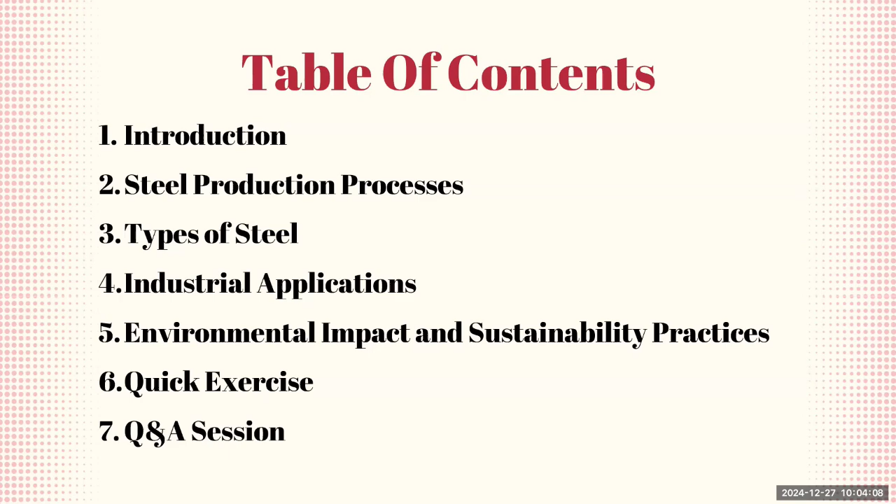So let's start with today's talk. We'll start briefly with an introduction to steel production, followed by an exploration of the various production processes, because there are many processes that differ. Then we will delve into the types of steel and see their unique properties before moving on to the actual industrial applications. We'll then discuss the environmental impact of steel production and the sustainability practices in this industry. To wrap things up, we'll have a quick exercise and finish with a Q&A session to address any questions you may have. All right, so let's start with the introduction.

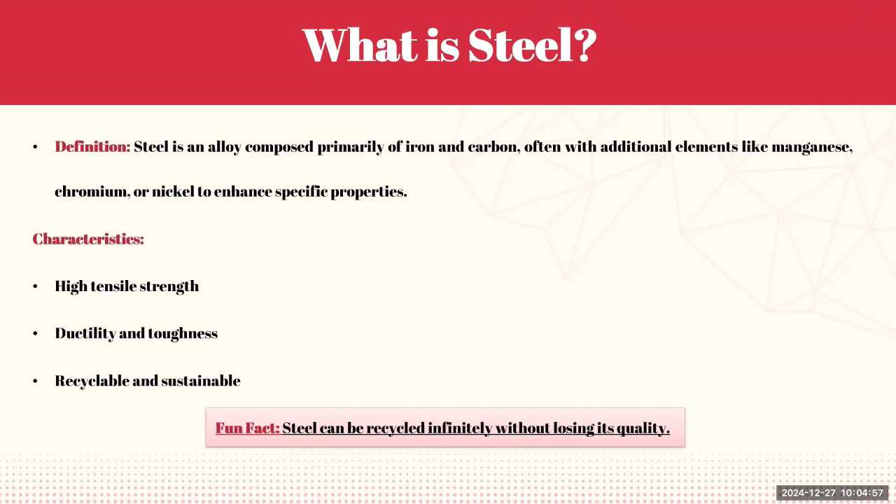So, first question, what is steel? We know that steel is one of the most essential materials in modern life. At its core, steel is an alloy primarily composed of iron and carbon, with elements like manganese, chromium, or nickel added to enhance its properties. What makes steel exceptional are its characteristics: high tensile strength, ductility, toughness, and its ability to be recycled indefinitely without losing quality. This combination of strength, versatility, and sustainability explains why steel is a cornerstone of industrial and structural applications worldwide. Fun fact: steel can be recycled infinitely without losing its quality, which is one of the most attractive features of producing steel.

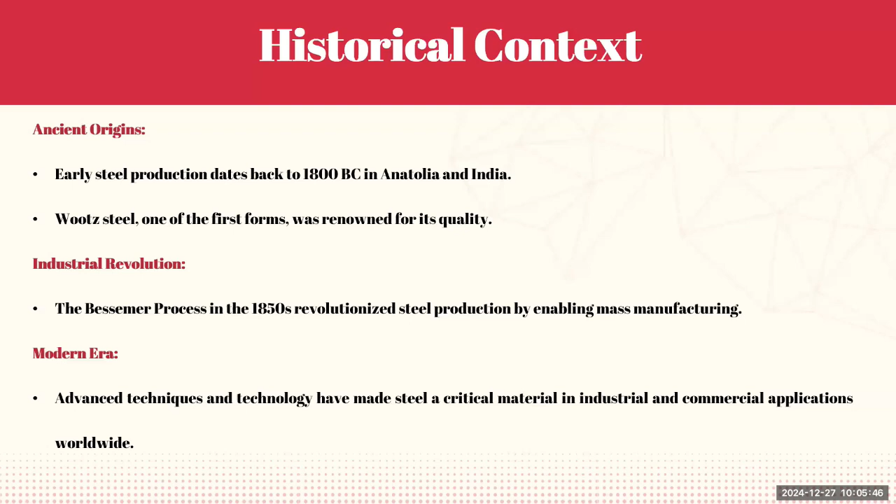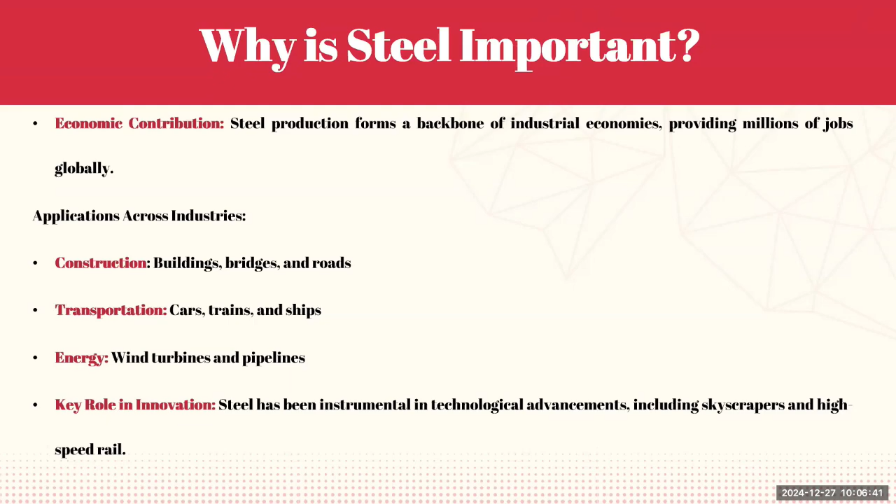Moreover, steel is a cornerstone of innovation. It has been integral to technological advancements, from constructing towering skyscrapers like the one you see in Dubai, for example, to enabling the development of high-speed rail systems. Steel truly stands as a symbol of strength and progress.

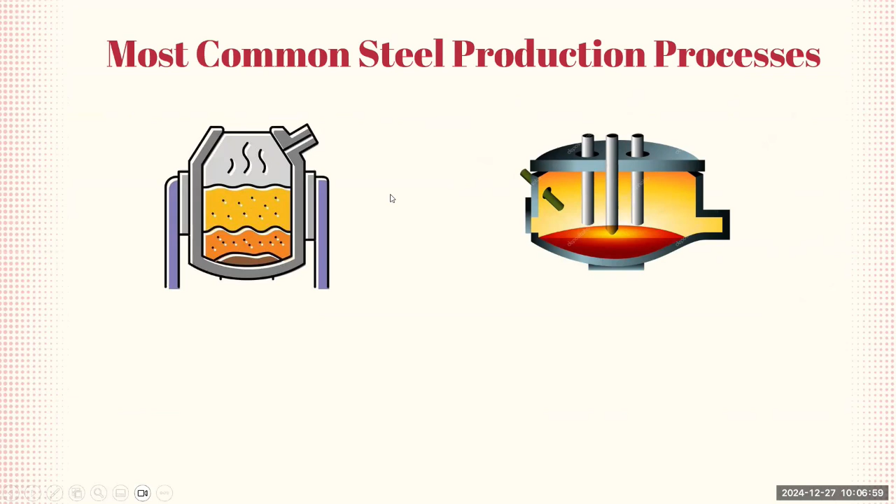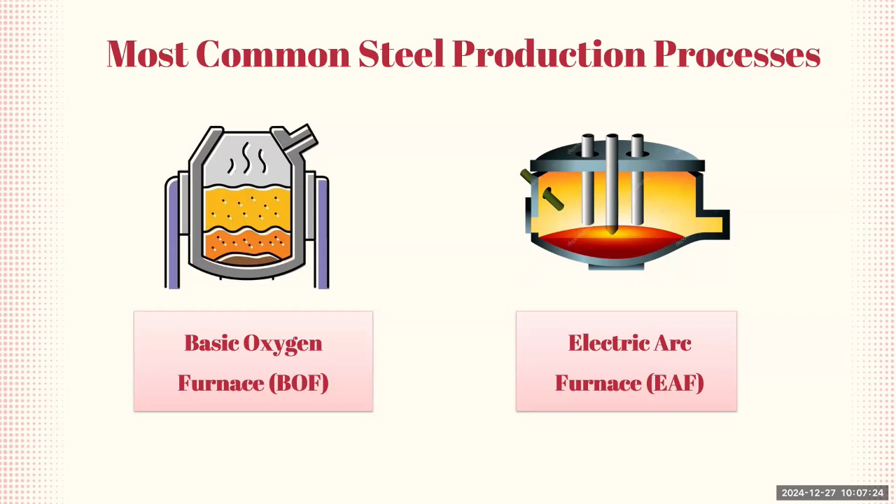All right, so now that we know a bit about steel, let's talk about the production processes and see how steel is actually made. I'll be focusing on the two most common steel production methods, which dominate the industry. The first is the basic oxygen furnace, or BOF for short, and the second is the electric arc furnace, or EAF for short. The BOF process refines molten iron from a blast furnace, combining it with scrap steel to produce high-quality steel efficiently, while the EAF method uses electricity to melt scrap steel or other iron sources, offering a more sustainable approach, especially in recycling. Let's look at each process and study more about it.

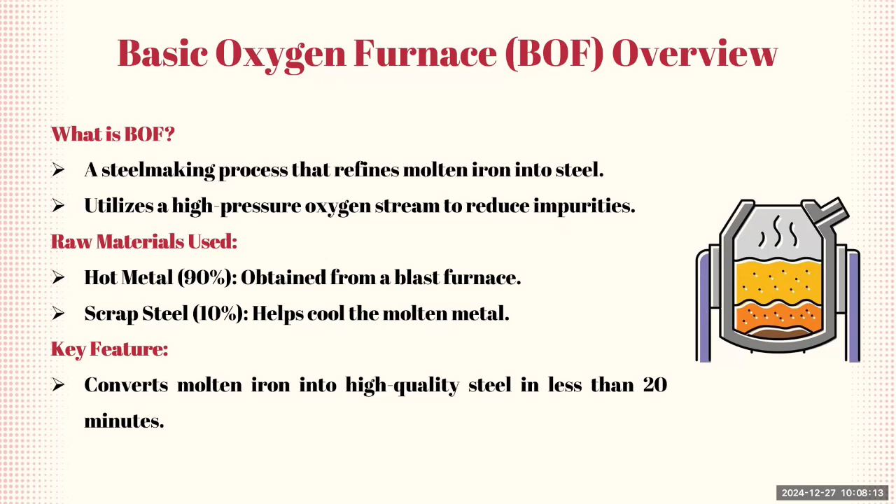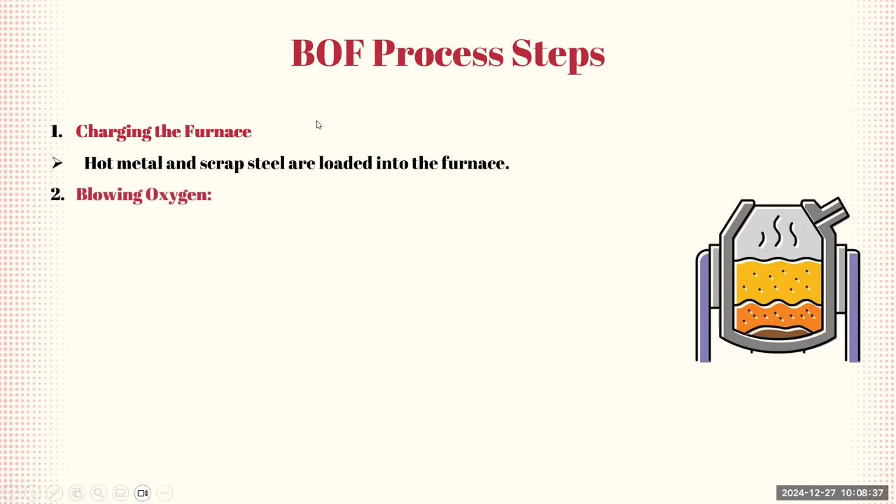Now, let's break down the key steps of the basic oxygen furnace process. The first step is charging the furnace: the process begins with loading hot metal and scrap steel into the furnace. Imagine you have this huge pot where you start loading the hot metal and the recycled steel in. The second step is blowing oxygen: high purity oxygen is then blown into the molten metal at supersonic speeds, which is very fast. This step is crucial as it oxidizes impurities like carbon, silicon, and phosphorus, forming a byproduct known as slag.

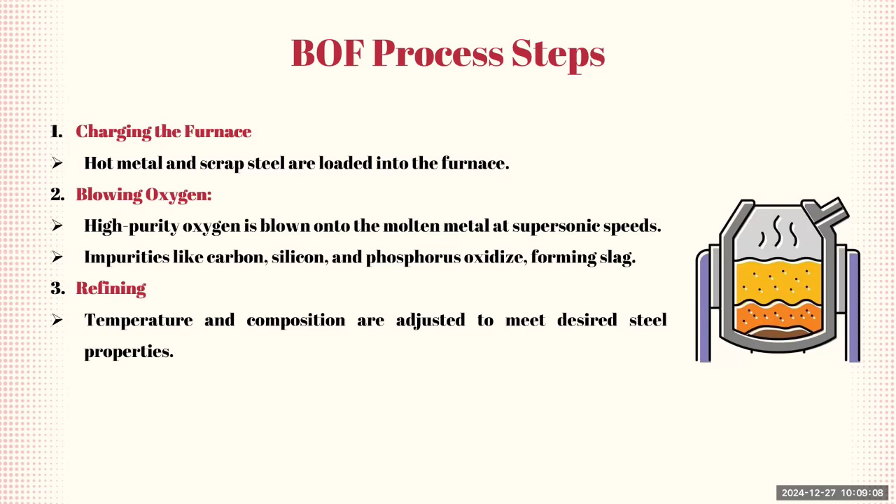Following this step, we have the refining step, which is after the oxidation, where the temperature and chemical composition of the molten steel are adjusted to achieve the desired properties for the final product. Lastly, we have the tapping, where the liquid steel is poured into a ladle for casting, while the slag, which contains the oxidized impurities, is left behind. So basically, we put the steel in the areas where we want to cast it, and this can be later processed for the desired product we want.

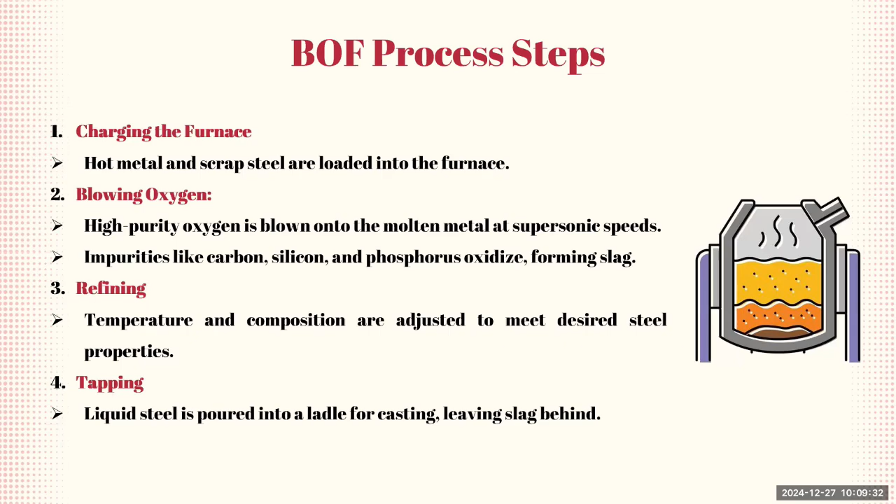All of these steps summarize the BOF process, which is a very highly efficient process for producing large volumes of high quality steel. The advantages are: first, high efficiency, so the BOF process can produce large volumes of steel in a short amount of time, making it highly efficient for industrial scale operations. Also, its quality is very high, so high-grade steel can be produced, which is important for demanding sectors like automotive, manufacturing, and construction. Lastly is flexibility, so it can incorporate around up to 30% recycled materials, which can help improve sustainability.

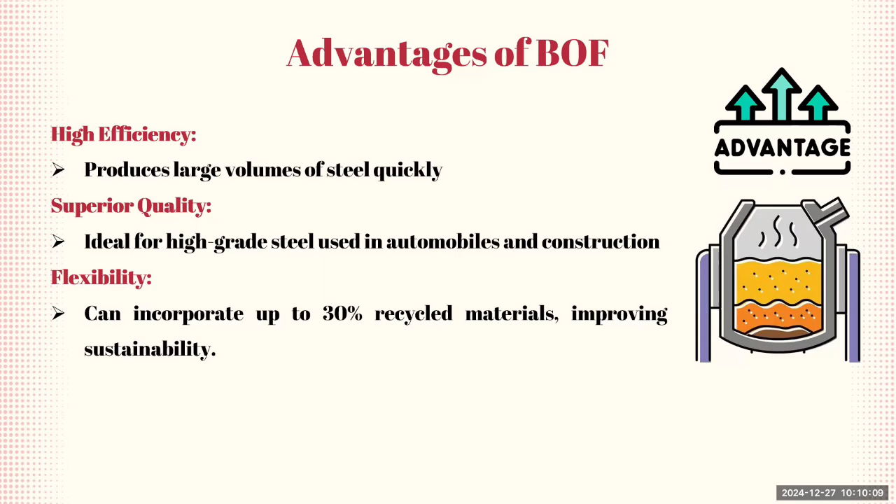But of course, the EAF can integrate more, which we'll be talking about soon.

As there are advantages, of course there are also challenges or disadvantages of this process. First, the most important disadvantage: high carbon emissions. A major drawback is its substantial CO2 output, largely due to the reliance on coal and blast furnaces, so the reliance on fossil fuels. This contributes to the steel industry's environmental footprint.

Second, it's also energy intensive. The BOF process requires a large amount of energy, especially for the iron making and oxygen production, which adds to operational costs and also releases more carbon dioxide emissions because of the need for this energy. Keep in mind, we are melting iron here, so the temperatures are very, very high.

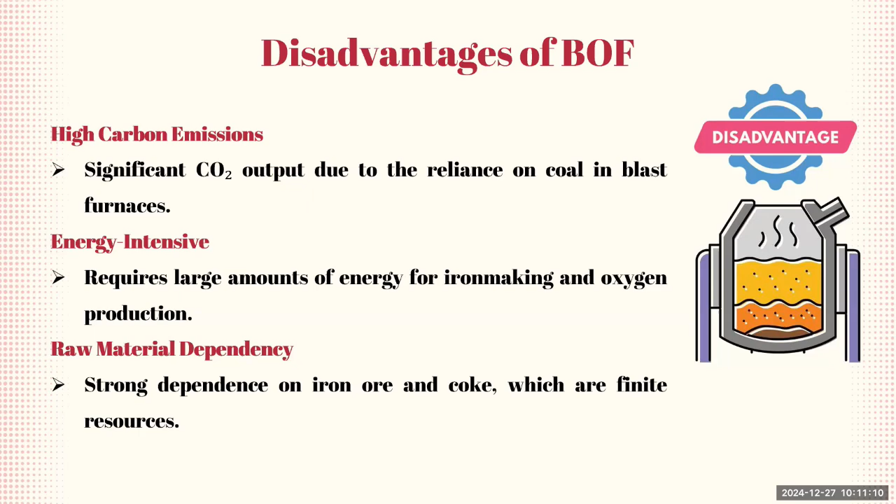Lastly is the raw material dependency. It's heavily reliant on iron ore and coke, both of which are finite resources, making it less sustainable in the long term. So these disadvantages underline the need for innovation and sustainability practices in steel production.

All right, so let's take a look at this quick one-minute video that shows or summarizes the BOF process. Dr. Lamed, could you please confirm if you can hear the video?

The basic oxygen furnace process is a method of steel making in which hot metal or pig iron is made into steel. Yes, we can hear.

Perfect. All right, let's begin again.

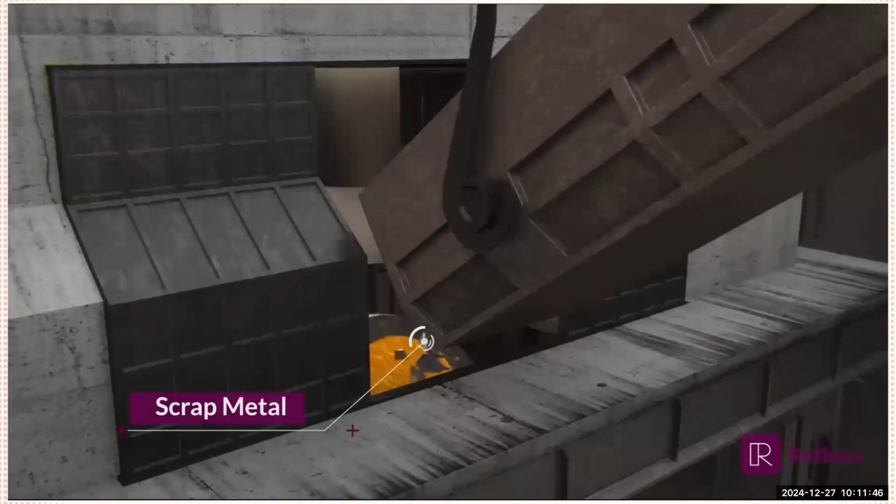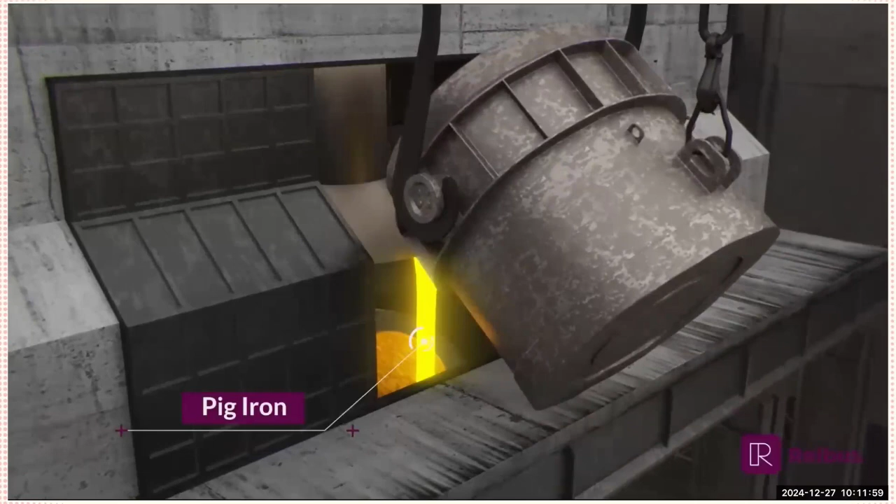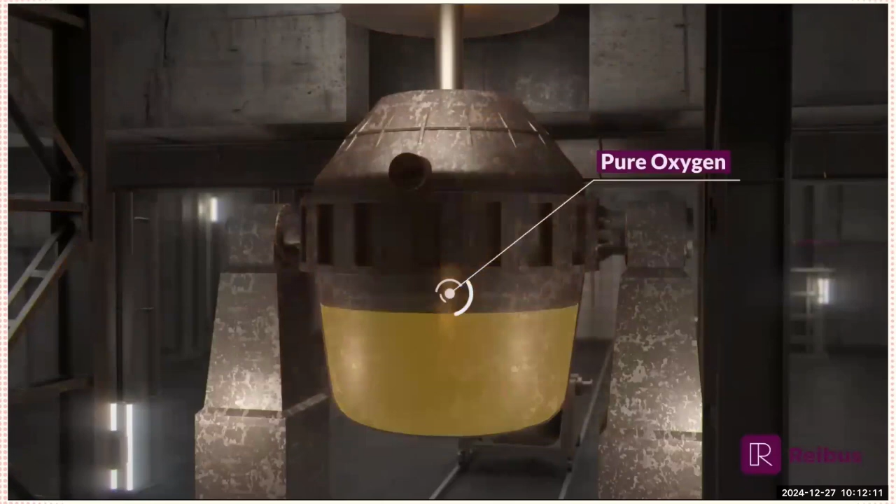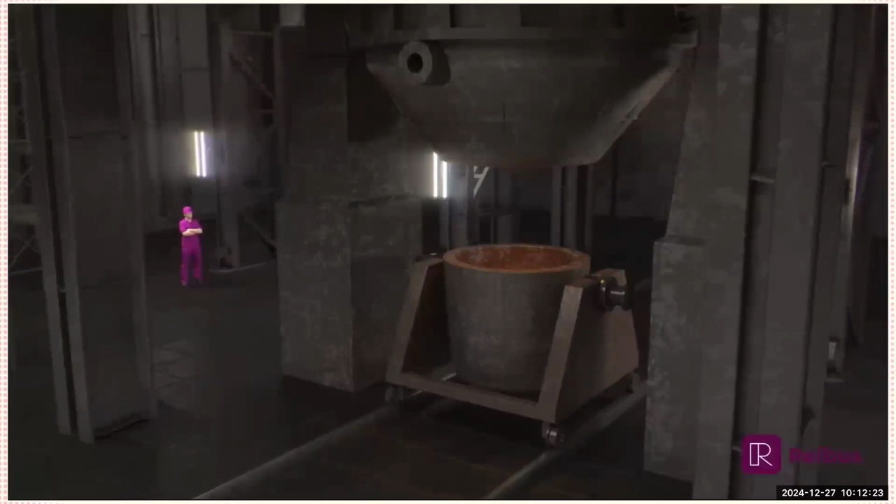The basic oxygen furnace process is a method of steel making in which hot metal or pig iron is made into steel. In this process, either hot metal or pig iron, steel scrap, and flux or burnt lime is charged into a furnace called a converter or vessel. Next, oxygen is blown into the mixture using a water-cooled metal tube called a lance. Once the carbon level has been reduced in the steel, the lance is removed, and the vessel is emptied by rotating it to pour the refined steel into a ladle. The vessel is rotated in the opposite direction to pour out and discard the slag, along with the impurities it absorbed.

All right, so this is just a quick animation to give you a better idea of how the process works. As we said, we have a huge furnace, and the raw materials are entered inside the furnace, and this is how we have this process.

All right, so now let's move on to the other process, which is the electric arc furnace. This process primarily focuses on melting scrap steel or direct reduced iron using high-powered electric arcs, making it highly reliant on electric energy compared to the BOF, which doesn't use electricity.

So the main input for the raw materials is scrap steel, which is recycled steel. Optionally, you can also add direct reduced iron, or DRI for short, which is added for quality enhancement. This is basically a type of iron that's produced from another plant, which is added to improve the quality of the steel.

The key features of this process are that it's incredibly flexible, allowing for smaller batch sizes and production of various steel grades. Importantly, it is more environmentally friendly compared to traditional methods, with higher recycling rates and lower carbon emissions. So this combination of adaptability and eco-friendliness makes the EAF a crucial player in modern steel production.

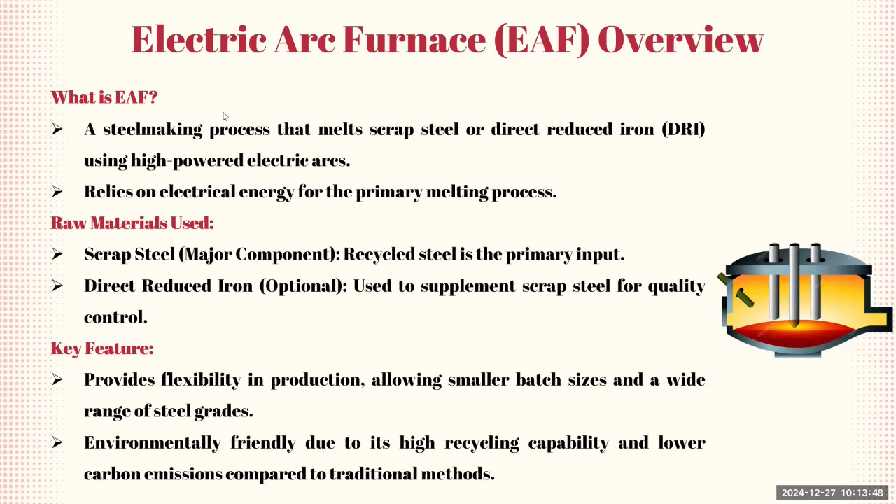So let's talk about the steps in the EAF process. The first step is similar: we have the loading step, where scrap steel or DRI, which is the direct reduced iron, is loaded into the furnace. This is the starting point, which is where the electric arc will be inserted.

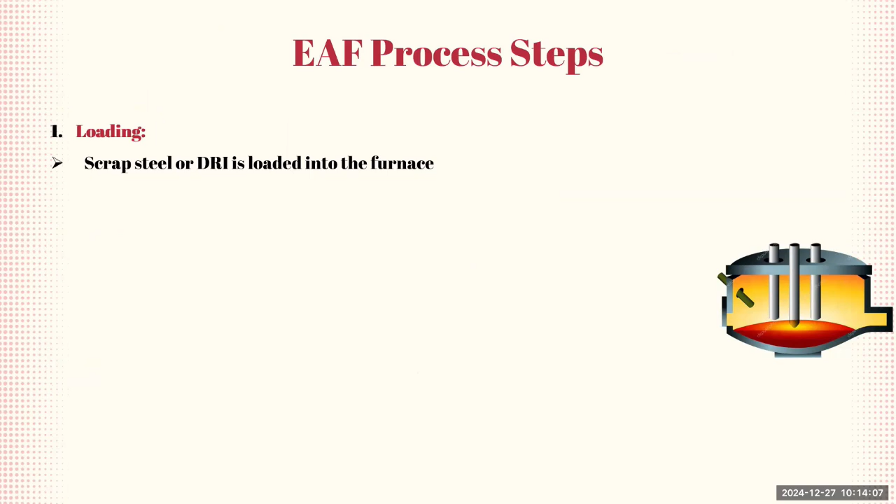Then we have the melting process.

In the melting process, high-powered electric arcs are generated between the electrodes and the scrap, melting the materials at extreme temperature. Imagine we have these electrodes inserted inside, producing electricity which heats and melts these materials at high temperatures.

Then we have the refining process, where adjustments to the molten steel composition are made by adding alloys, ensuring the steel meets specific quality and property requirements. Think of it like adding spices or components to improve the quality of the final steel.

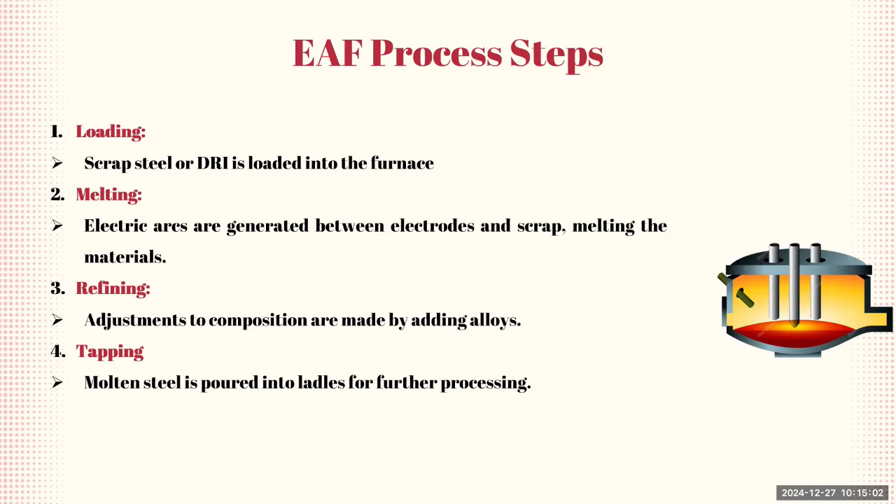Then we have the final step, which is tapping. The molten steel is poured into ladles for further processing, like shaping or casting based on our desired product. So these steps summarize the EAF process.

All right, how about the advantages? First, this process has higher recycling capability, so it can utilize up to 100% scrap steel as input, making it very strong in recycling and reducing waste. We do not need to add any virgin steel; we can just use scrap steel, which is recycled steel, to produce new products.

It also has lower emissions, because we do not use fossil fuels like coal compared to the BOF process. If the electricity is generated from renewable energy, this makes it an even cleaner or greener process. It has good energy efficiency because it uses electricity as its primary energy source, meaning EAF processes can be integrated with renewable energy, making it a future-proof choice.

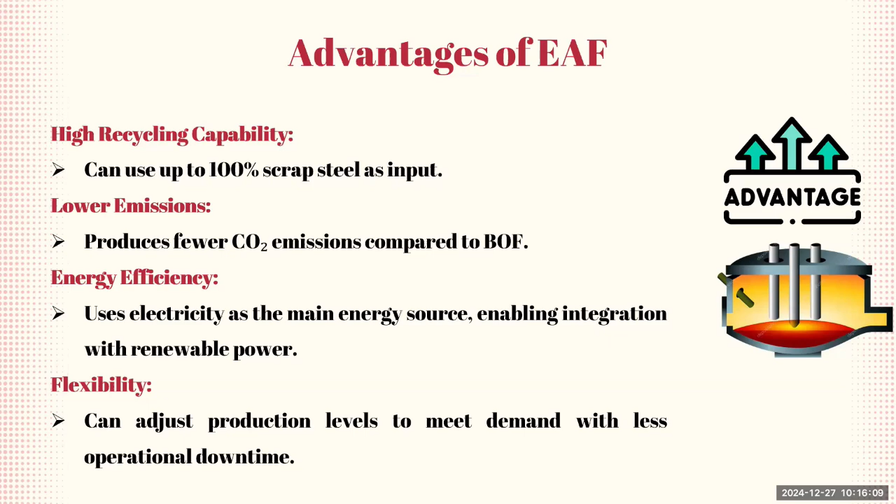Lastly, the flexibility: the EAF can adjust production levels to match demand, giving good operational flexibility and reducing downtime. So these are some of the advantages of the EAF process.

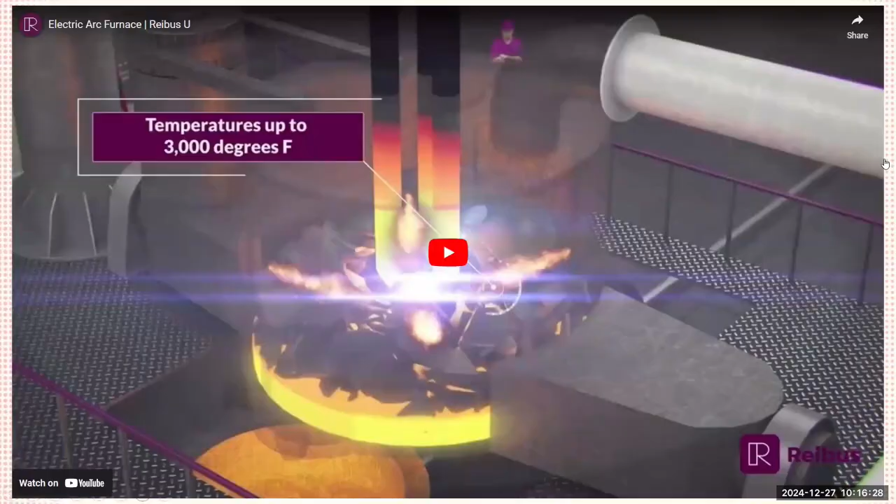As for the disadvantages, it depends on electricity. High electricity consumption means higher costs in areas with expensive or unreliable power, since every country has different electricity prices. If the electricity is expensive, this might make the process less advantageous.

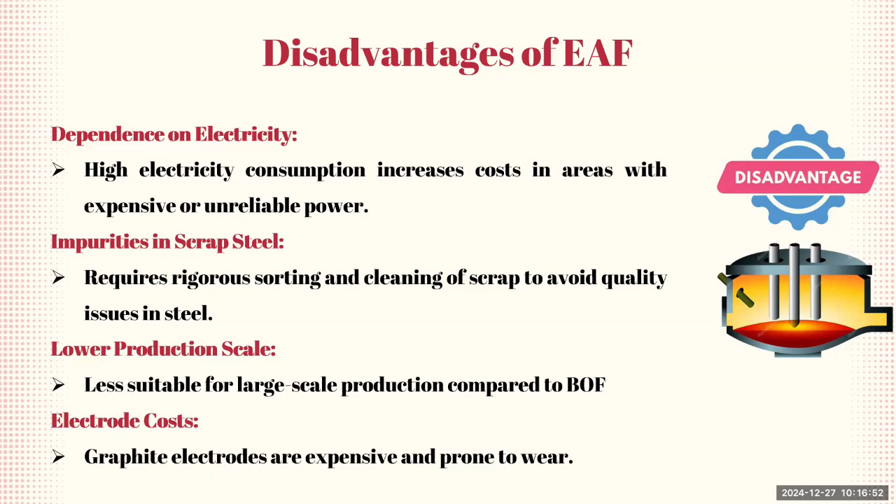There are also some impurities in scrap steel, so we need to ensure the product meets demand, perhaps by adding DRI. There's also lower production scale compared to BOF, making it less suitable for large scale production. Lastly, the electrode costs are expensive—graphite electrodes are costly and need to be maintained every once in a while.

All right, let's take a look at another quick animation to understand how the EAF process works.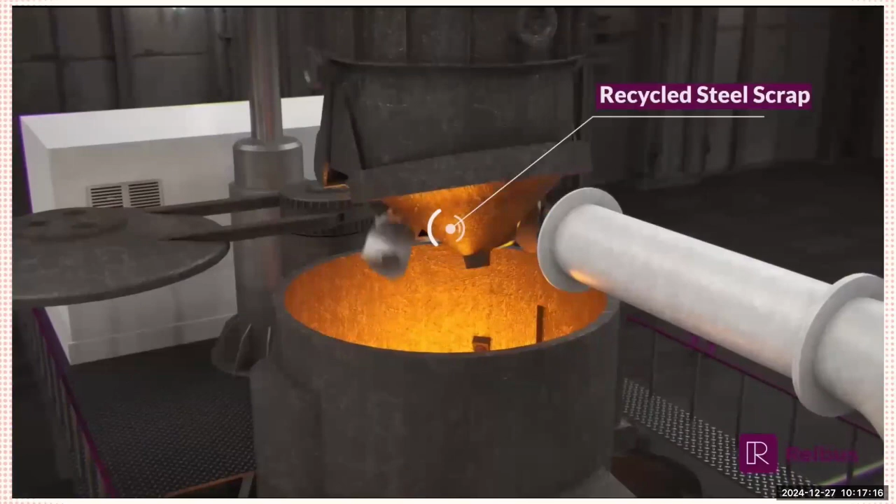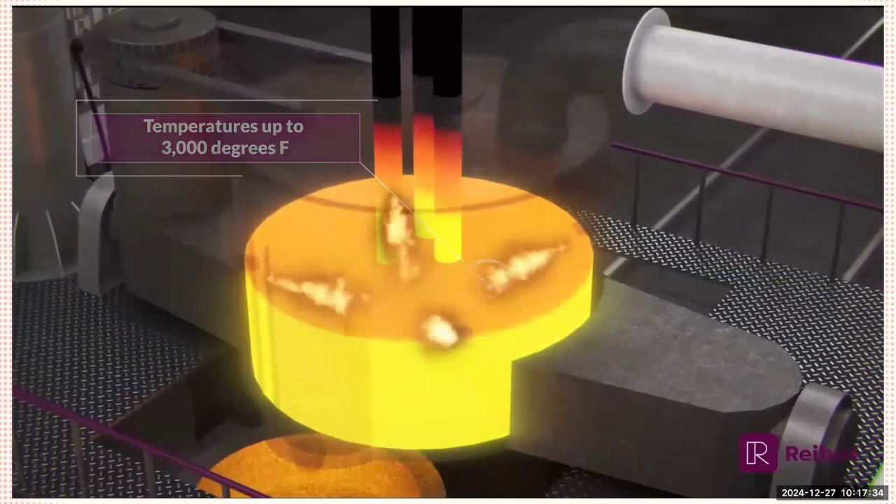Next, three large graphite electrodes send high-powered electric arcs through the scrap, generating temperatures up to 3,000 degrees Fahrenheit. At this temperature, the iron-rich raw materials melt into liquid steel, and a protective slag layer is formed.

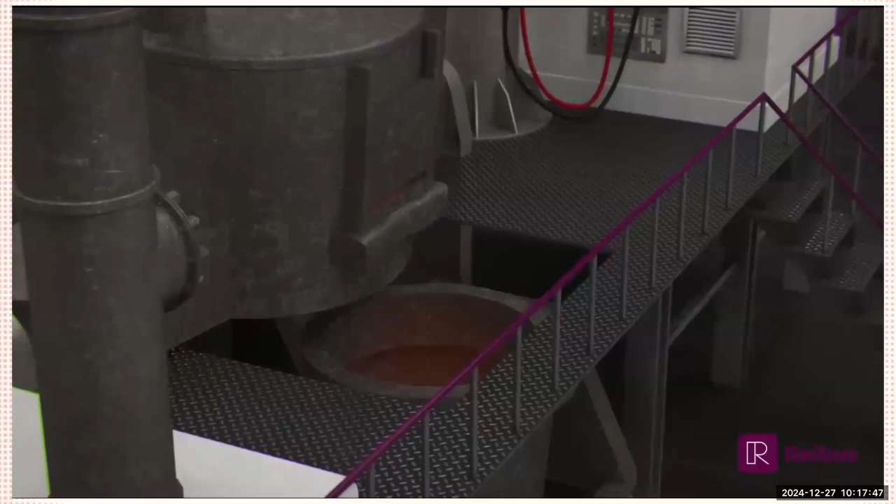Once the steel has been completely melted, it is tapped into a ladle for further processing, and the excess slag is poured off in preparation for the next heat. EAFs are very popular when building new steel facilities because of their small size, lower cost, and reduced environmental impact.

For the input material, BOF uses primarily iron ore, coke, and some scrap, while EAF relies on scrap steel or direct reduced iron.

As for the energy source, BOF depends on coal and oxygen for its operation, whereas EAF runs on electricity, making it potentially compatible with renewable energy sources.

As for CO2 emissions, BOF has high carbon emissions due to its reliance on coal, while EAF has significantly lower emissions, especially if renewable energy is used for electricity production.

For the recycling rate, BOF has a limited recycling rate, around 30% of scrap steel can be used, whereas EAF can utilize up to 100% recycled materials, making it even more eco-friendly.

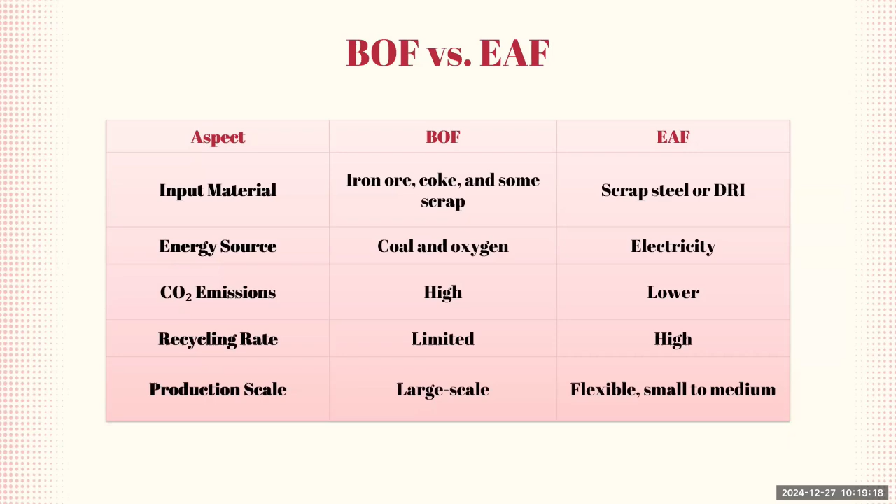Lastly, for production scale, BOF is ideal for large-scale production, while EAF offers flexibility for small to medium production scales. This is also one of its advantages, as it's quite flexible.

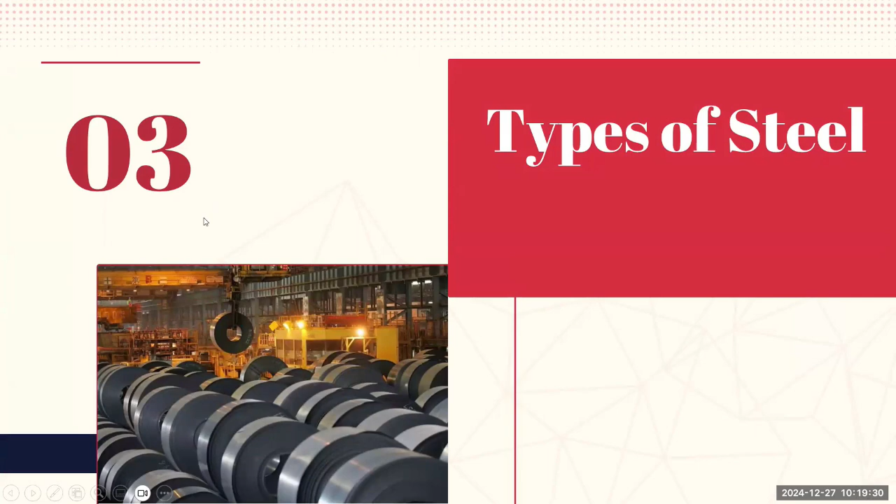All right, with that out of the way, now let's talk about the different types of steel being produced. Steel comes in various types, each tailored to specific applications and industries. The most common types include carbon steel, alloy steel, stainless steel, and tool steel. Each type has unique characteristics that make it suitable for different uses, from construction to manufacturing and other industries. In the following slides, we'll dive deeper into each type and explore their properties and uses.

So I know in this picture, they all look the same to you, but trust me, the properties differ for each type of steel. So let's talk about carbon steel first.

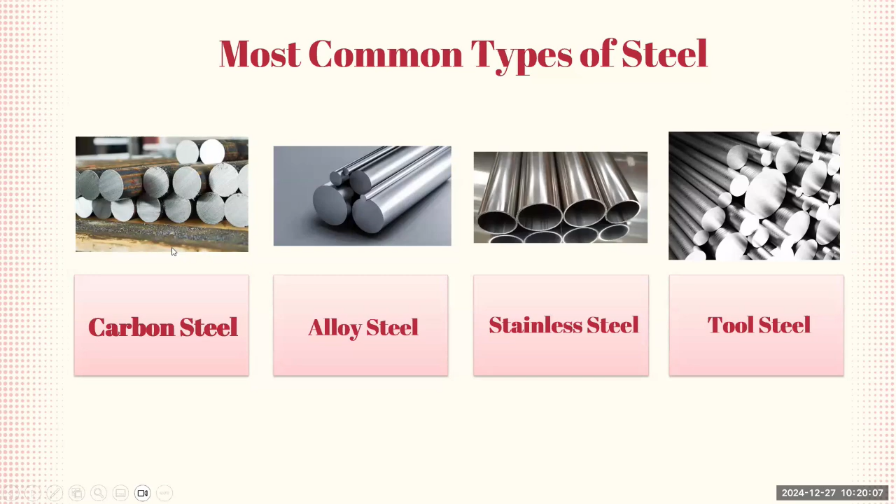Carbon steel is the backbone of steel production, accounting for nearly 90% of all steel that is being made. Its key feature lies in carbon as the primary alloying element, which directly influences its strength and flexibility.

There are three main subcategories: low carbon steel, which is highly ductile and weldable, making it ideal for construction; medium carbon steel, which is perfect for machinery components; and high carbon steel, known for its hardness, suitable for tools and springs.

The applications of carbon steel range widely depending on the type, from pipes and bridges to essential automotive parts. Its versatility makes it an essential material in numerous industries.

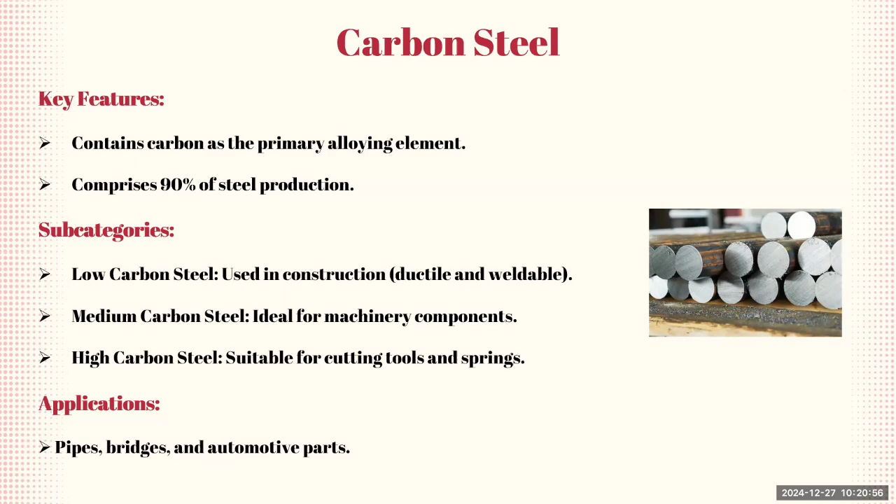Then we have alloy steel. It stands out for its unique composition, containing elements such as manganese, chromium, nickel, or molybdenum. These additional elements allow it to be tailored for specific properties like enhanced strength, toughness, and wear resistance.

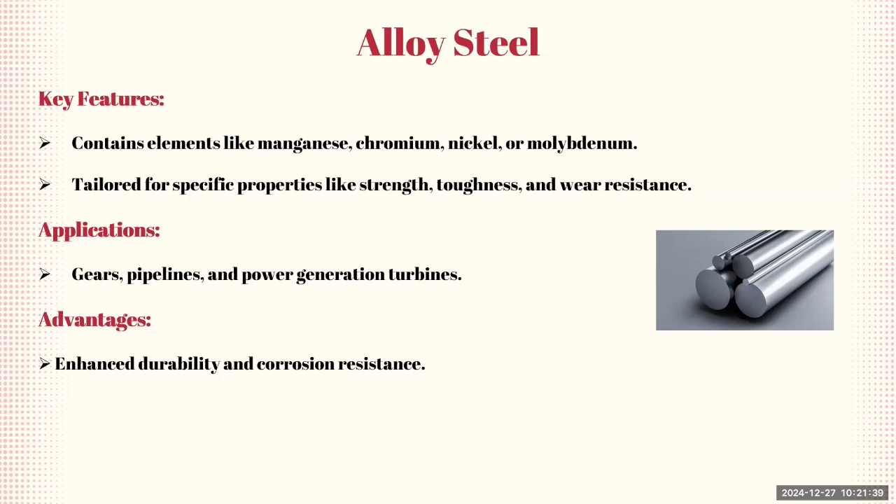Common applications of alloy steel include gears, pipelines, and power generation turbines, where durability and performance under stress are critical. Its primary advantage lies in its exceptional durability and resistance to corrosion, making it a go-to material for industries requiring reliability in demanding environments, like power plants.

Then we have stainless steel, which I'm sure everyone has heard about. Stainless steel is a versatile material known for its exceptional corrosion resistance, achieved through a minimum chromium content of 10.5%. This gives it its attractive, polished appearance, which is widely recognized.

It can be categorized into three main subtypes. Austenitic stainless steel is non-magnetic and highly corrosion resistant, ideal for demanding environments. Martensitic is hard and magnetic, commonly used in cutlery and tools like forks and knives. Ferritic offers moderate corrosion resistance and is a more economical option.

Applications range from medical instruments and kitchen appliances to architectural designs, showcasing that it's a reliable and aesthetic steel used across diverse industries.

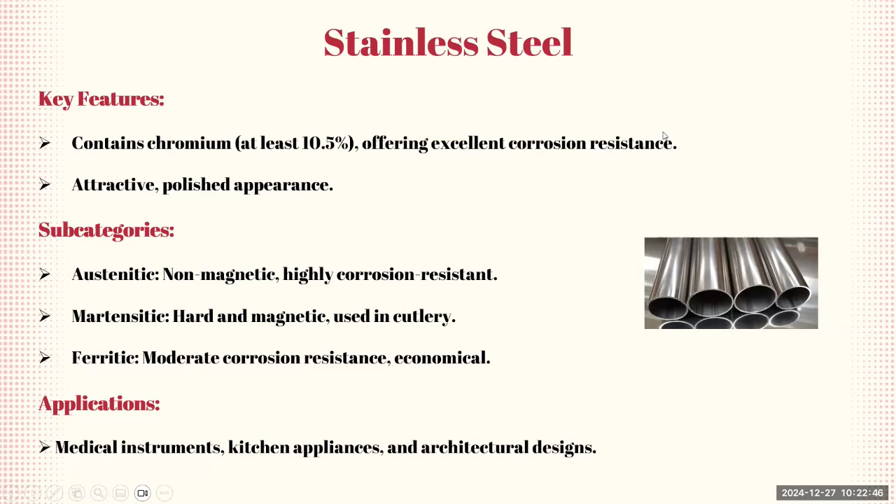Lastly, we have tool steel, specifically designed to withstand high mechanical stress and elevated temperatures, making it perfect for demanding applications. Its key features include elements like tungsten, molybdenum, cobalt, and vanadium, which provide superior hardness and resistance to deformation under intense conditions.

This steel is widely used in manufacturing cutting tools, dies, and molds due to its exceptional durability and toughness, which is why it's called tool steel. In industries where precision and strength are important, tool steel stands out as the material of choice because it's very reliable and efficient even in rigorous environments.

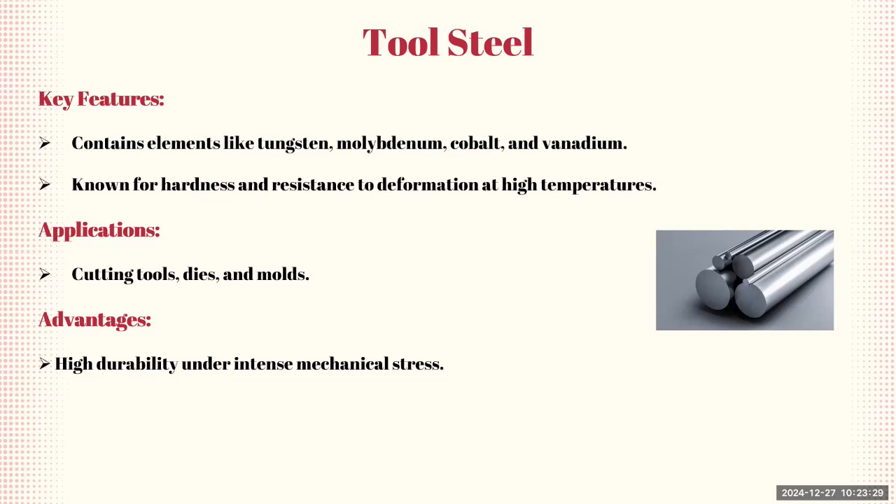So let's do a quick summary. Carbon steel is known for its high strength, making it essential for constructing bridges, buildings, and automotive parts. Alloy steel offers enhanced properties like toughness and wear resistance, useful for gears, turbines, and pipelines.

Stainless steel stands out for its corrosion resistance, which is why it's widely used in medical instruments, kitchenware, and architectural designs. Tool steel is known for its hardness and temperature resistance, useful for tools, dies, and molds.

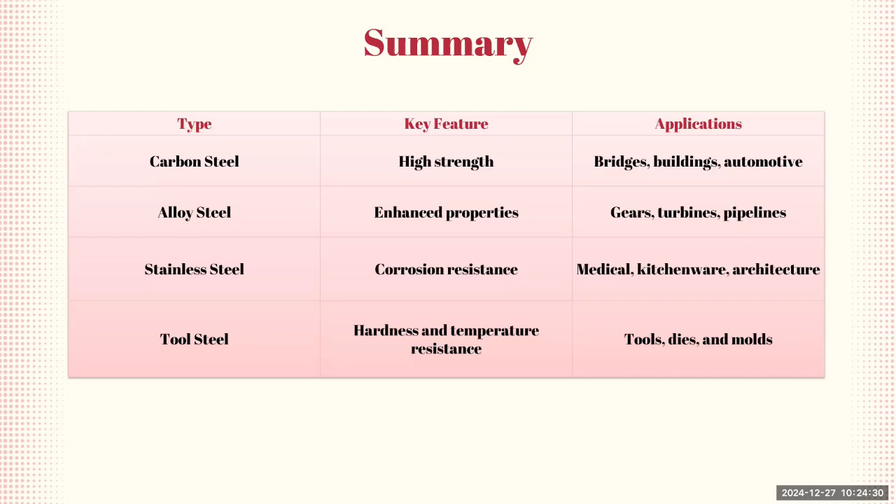So we can see that although they are somewhat similar in their properties, each steel has its own key feature and its own industry where it will be very useful. This is why it's important to know there are different types of steel, other than the normal stainless steel that we keep using in our daily lives.

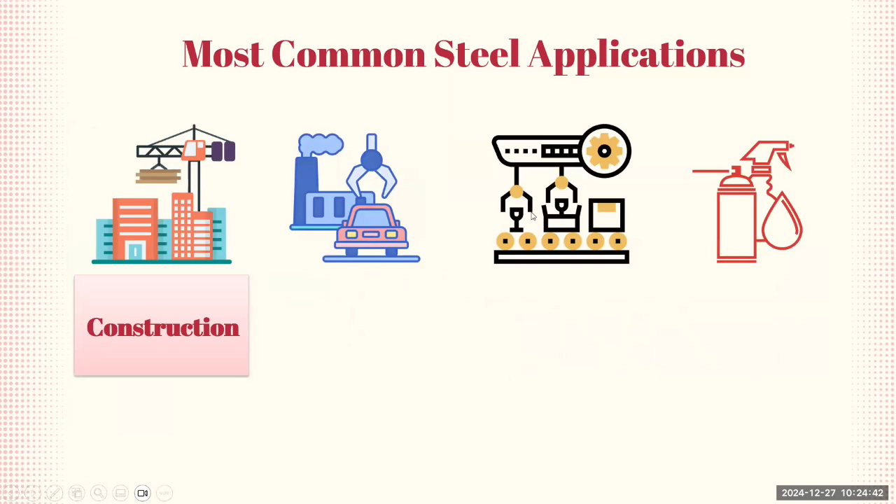Now let's talk quickly about industrial applications. We have four most common steel applications: first is construction, then the automotive sector, then the manufacturing sector, and lastly specialty products. Let's quickly go over each industry.

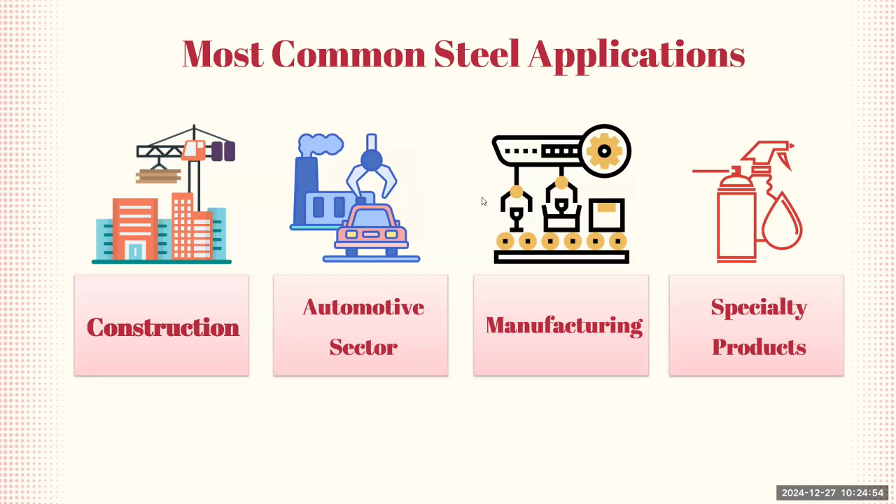Steel and construction: steel is an incredibly versatile material with many applications. In this slide, we highlight construction. Everywhere you see any construction, bear in mind that steel is 100% used somewhere.

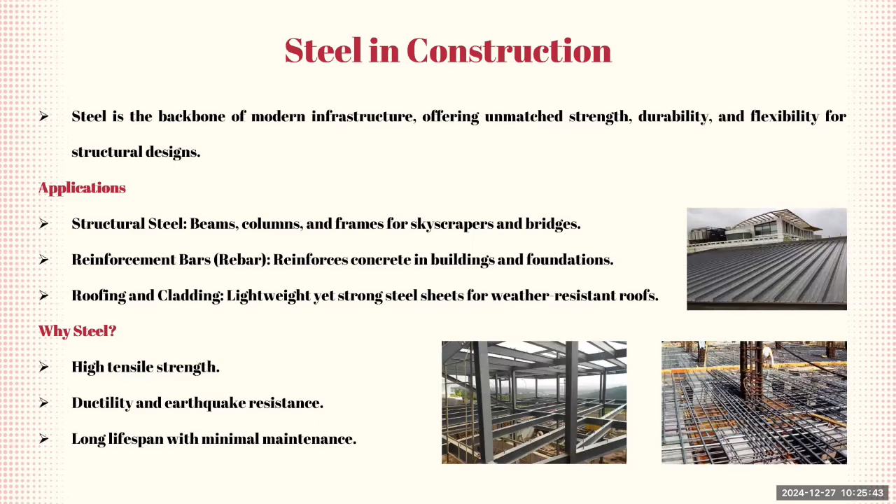So why would we use steel other than other materials? It's because it has a high tensile strength. It's ductile and it also resists earthquakes. And it also has a long lifespan with minimal maintenance required.

As for the automotive industry, it strikes the perfect balance between safety, performance, and cost. So it can be used for body panels. Low carbon steel is favored for its formability and durability, making it ideal for crafting vehicle exteriors. It can also be used for the chassis and frames, where advanced high-strength steel is used to create lightweight yet robust structures, contributing to vehicle stability and performance.

Can also be used for engine components. Alloy steel offers exceptional wear resistance and thermal stability, so this can be used in the engine. And lastly, it can also be used for exhaust systems. Stainless steel is a material of choice in exhaust systems due to its superior corrosion resistance, especially against heat and moisture.

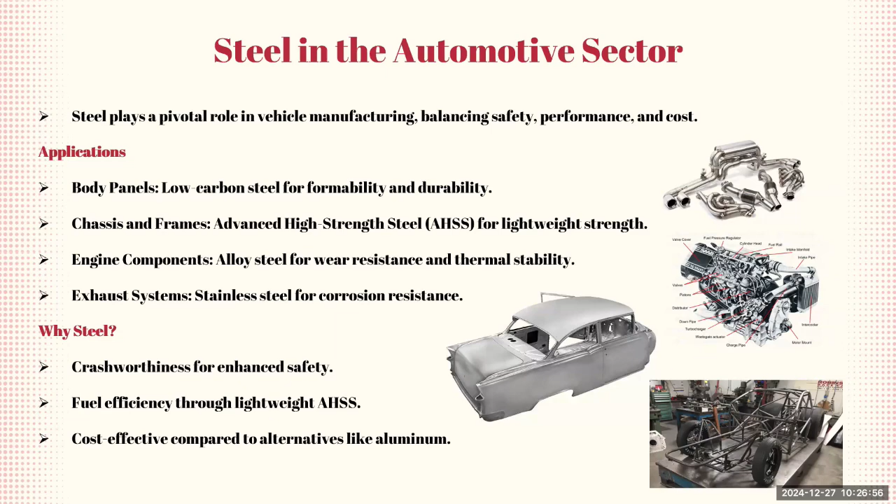So why steel in this industry and not other material? Well, first, it enhances the crashworthiness, so this ensures passenger safety. It also provides fuel efficiency because it's very lightweight. And lastly, it's cost effective compared to other alternatives like aluminium, for example, which could be more expensive.

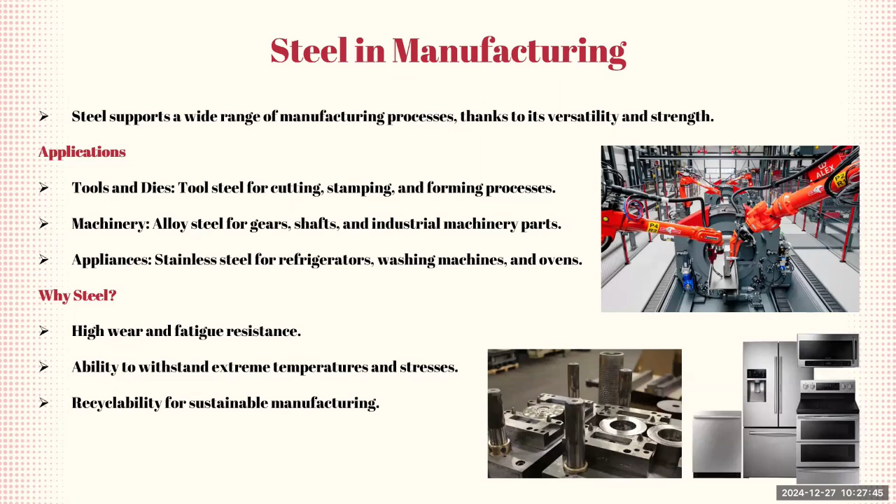And of course, the most important application is in our fridges, washing machines, and stoves, so in appliances. Stainless steel is commonly used in a lot of these machines that we use on a day-to-day basis. So why steel? It has high wear and fatigue resistance, can handle high temperature and stresses, and it's also recyclable, which is very important to promote sustainable manufacturing.

And lastly, we have steel and specialty products. It can be used in medical devices - if you've been to the dentist, you can see that a lot of this equipment, or in surgery, uses stainless steel. It can also be used for aerospace components, because airplanes need a lightweight alloy steel which can be strong yet light to ensure the aerodynamics.

And then in the energy sector, it can be used for turbine blades - wind turbines, for example, use a lot of steel. And lastly, it can also be used in consumer goods - some of your jewelry or watches are also made from stainless steel.

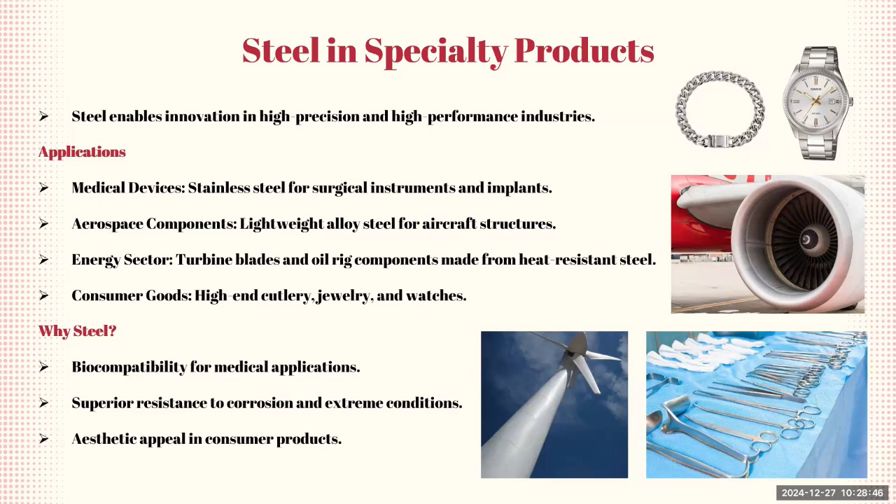So why steel? Because it's biocompatible, so for medical applications we can use it to operate on humans with no issues. There's also superior resistance to corrosion and extreme conditions. And lastly, it also has an aesthetic appeal in consumer products like watches and so on.

Now let's talk about an important issue that surrounds steel production, which is the environmental impact and also some of the sustainability practices. Steel production is very important, but it is also a very carbon emitting sector. While it's critical for modern infrastructure, it accounts for around 7 to 9% of global CO2 emissions, making it one of the largest industrial contributors to climate change.

So why is that? It's because emissions mainly stem from the combustion of fossil fuels, like coal in the blast furnaces, and from process emissions during the reduction of iron ore to iron. Did you know that producing just 1 ton of steel emits approximately 1.85 tons of CO2? That's a very huge figure. The basic oxygen furnace also contributes to a majority of these emissions.

This is why it's important to decarbonize steel. First, it's to meet global climate targets, like achieving net zero carbon emissions by 2050, and also to reduce the environmental footprint of industries that rely on steel. This paves the way for a more sustainable future. So this is not just an industry challenge, but rather a global priority.

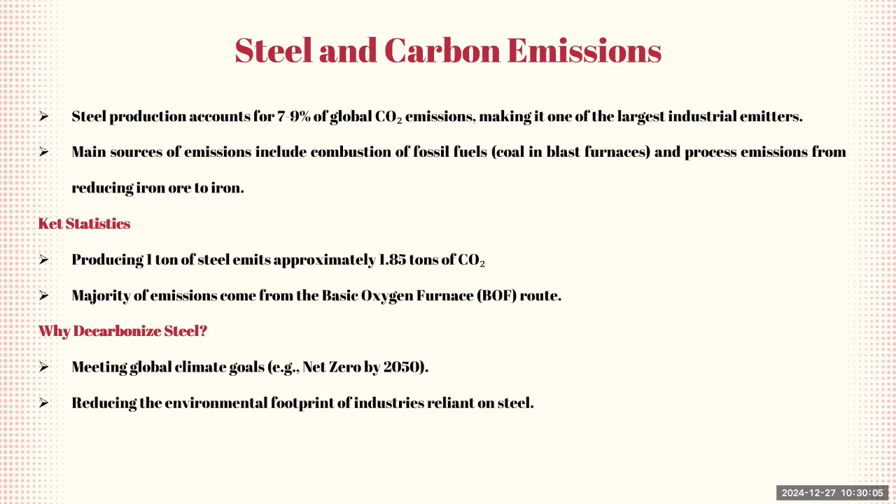So let's explore how steel can be decarbonized. We have three green steel production pathways. The first one is hydrogen direct reduction, which replaces the natural gas or coal used with green hydrogen during the reduction process. This results in zero carbon emissions from the reduction stage, positioning it as a game changer for sustainability.

Then we have the electric arc furnace. By utilizing renewable electricity to melt scrap steel, the EAF significantly cuts down on CO2 emissions compared to the traditional BOF method. This process also supports higher recycling rates, almost 100%, making it both eco-friendly and resource efficient.

And lastly is carbon capture and storage, which I'm sure you have heard about, which is to capture CO2 emissions directly from steel plants and then store them underground or utilize them later in another process. It's particularly effective for retrofitting existing infrastructure. Imagine we already have a plant and we cannot afford to completely change the whole plant to a different process - what we can do is add carbon capture storage to capture the CO2 being emitted from that plant.

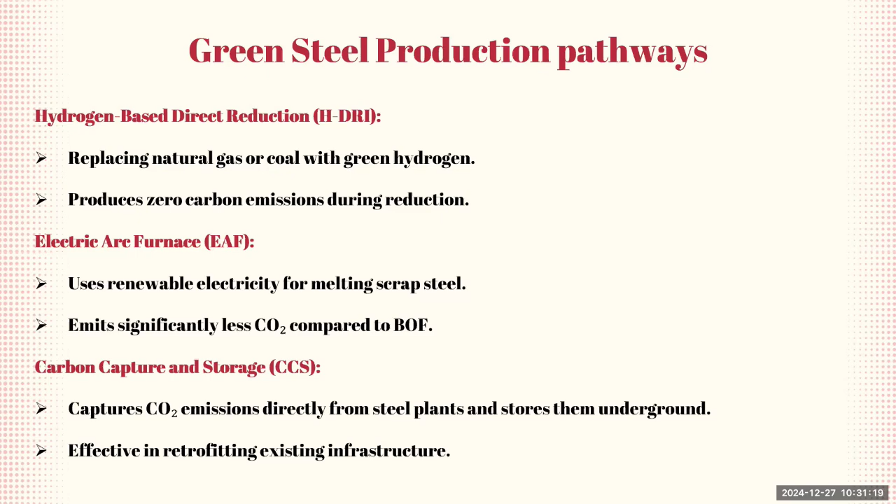Then we also have recycling and circular economy, which is important. We know that steel is 100% recyclable when we use the EAF process, for example. So this is a very important part. We need to use recycled steel scrap, which can reduce emissions by up to 75% compared to producing virgin steel. So this significantly cuts down the environmental footprint.

Then we have the circular economy concept, which focuses on extending the life cycle of steel products. In this way, we reduce waste and resource consumption. We should also design steel products with recyclability in mind to ensure that we can re-enter the production cycle at the end of their use, minimizing waste.

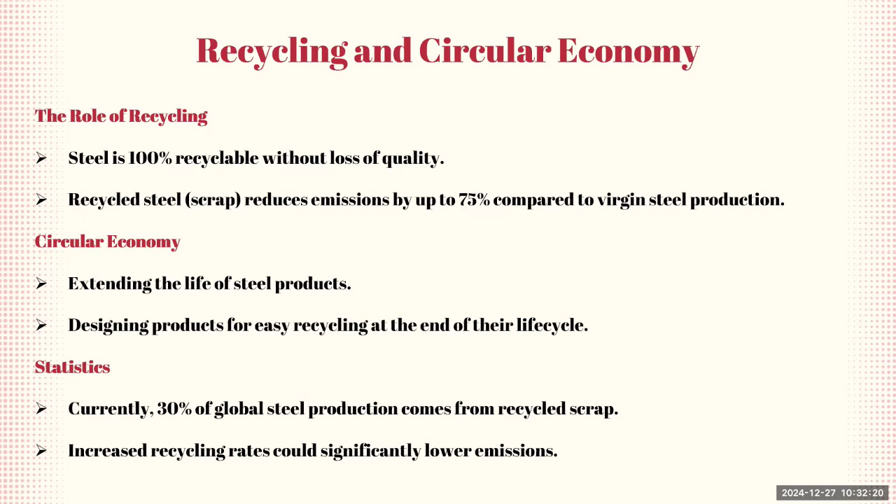Lastly, for some statistics, today 30% of global steel production originates from recycled scrap. Increasing this percentage could have a dramatic impact on lowering global emissions and driving sustainability. So recycling is not just about reusing materials, but we should actually rethink how we design these materials to ensure they have a longer shelf life.

All right, now let's talk about some industry and policy initiatives. The first industry-led initiative is the ResponsibleSteel certification. This ensures that any company producing steel needs to be accountable for ethical and environmental standards. Also, leading companies are now using green hydrogen and renewable energy to decarbonize the steel production process.

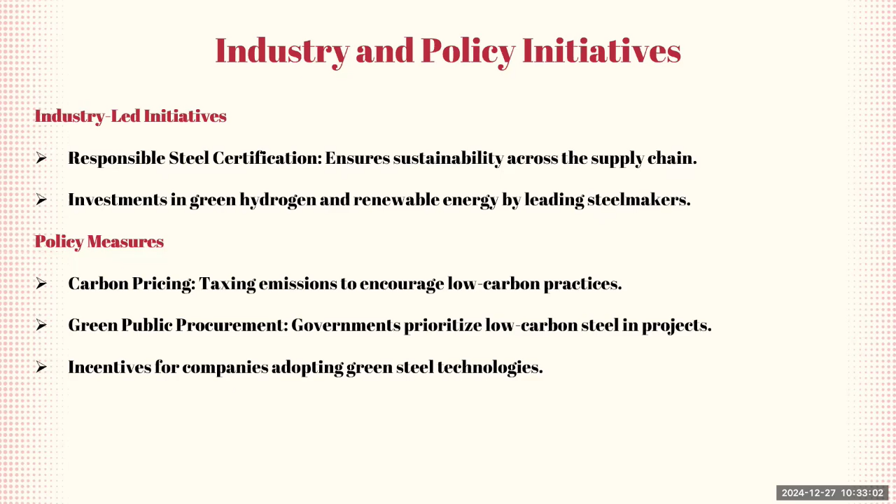As for the policies, we have policies like carbon pricing, green public procurement, and incentives. I don't want to go deep into these, but just to give you an idea that some policies are being made to ensure steel production is going towards a cleaner path.

That being said, let's talk about some decarbonization success stories. In Sweden, they have the HYBRIT project, the world's first hydrogen-based steelmaking pilot, which showcases that a process can actually achieve zero carbon emissions during production. It's a groundbreaking shift from traditional methods.

Then we have ArcelorMittal, which has been investing in carbon capture technologies and renewable energy for steel production plants, demonstrating that even large-scale productions can be cleaner.

And then we have Japan's COURSE50 program, where this initiative aims for a 50% reduction in steel industry emissions by combining hydrogen and carbon capture technologies. These examples underscore a powerful message: decarbonizing steel is not an aspiration or a dream, it's actually achievable through innovation, investment, and collaboration.

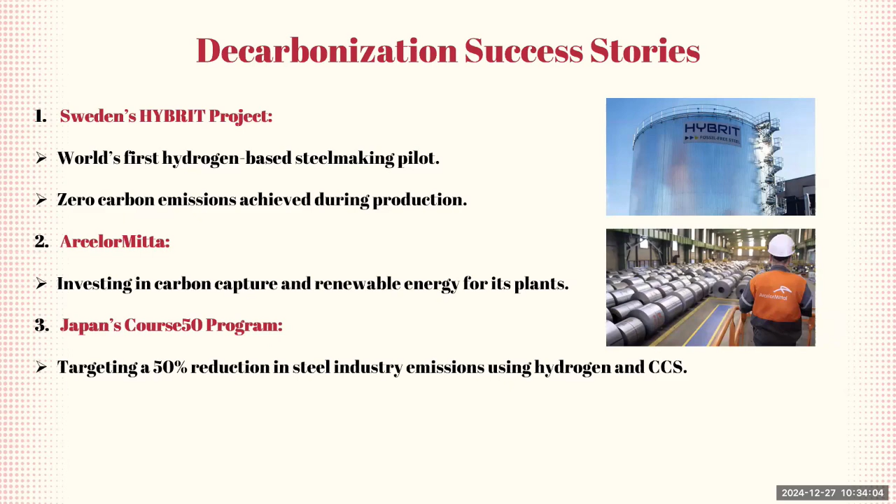So the path ahead: first is to scale up renewable energy to power the EAF and other hydrogen-based direct reduction methods. As renewable energy gets more attention and this process gets cheaper, this would encourage many companies to invest in these technologies.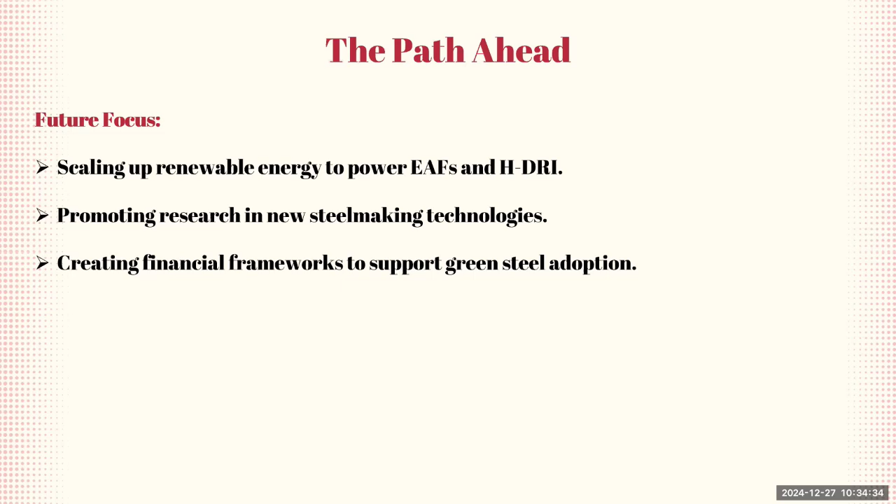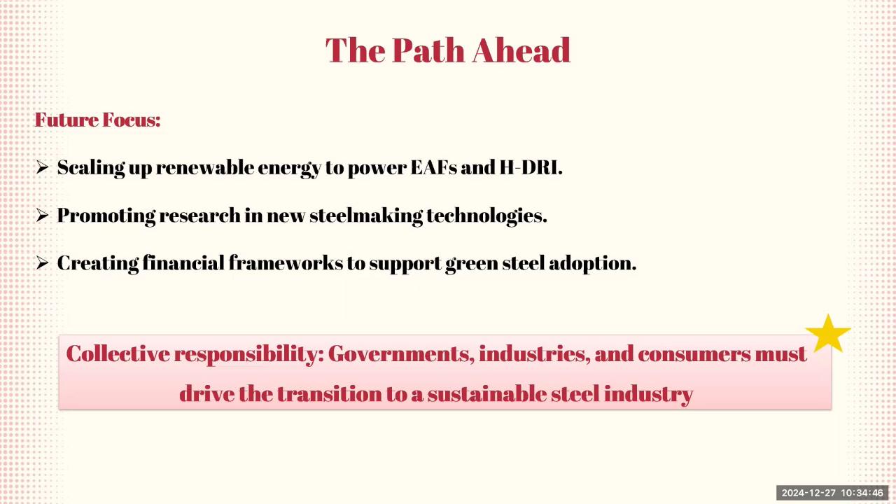We should also promote research in new steelmaking technologies and see how we can improve our existing production processes. Lastly, we need to create financial frameworks to support green steel adoption. This is a collective responsibility: governments, industries, and consumers must drive the transition to a sustainable steel industry.

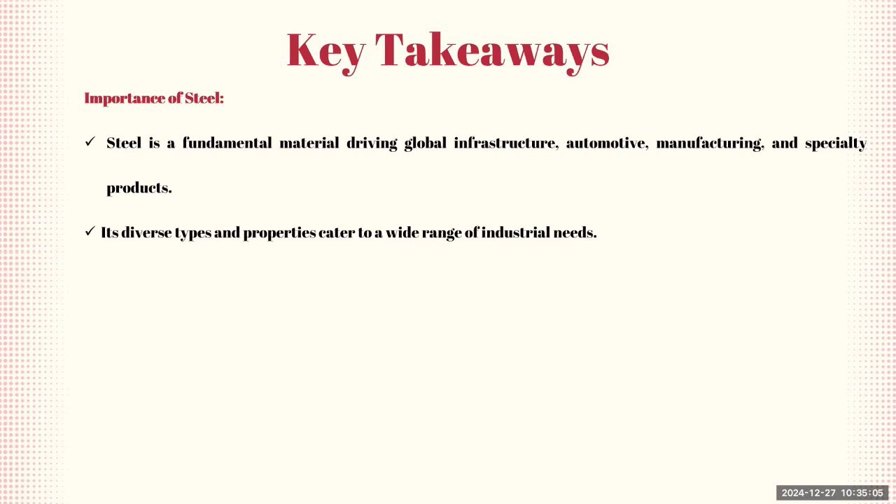So with that, let us conclude our talk and see what we've learned so far. First, we've learned that steel is very important. It's a fundamental material driving global infrastructure, automotive, manufacturing, and specialty products. Its diverse types and properties cater to a wide range of industrial and consumer needs.

As for the production processes, we learned the first process, which is the basic oxygen furnace. It's efficient but reliant on raw materials like iron ore and has significant environmental challenges due to the coal being used. The second method is the electric arc furnace, which is flexible, enables higher recycling rates, and holds promise for decarbonization efforts in the future.

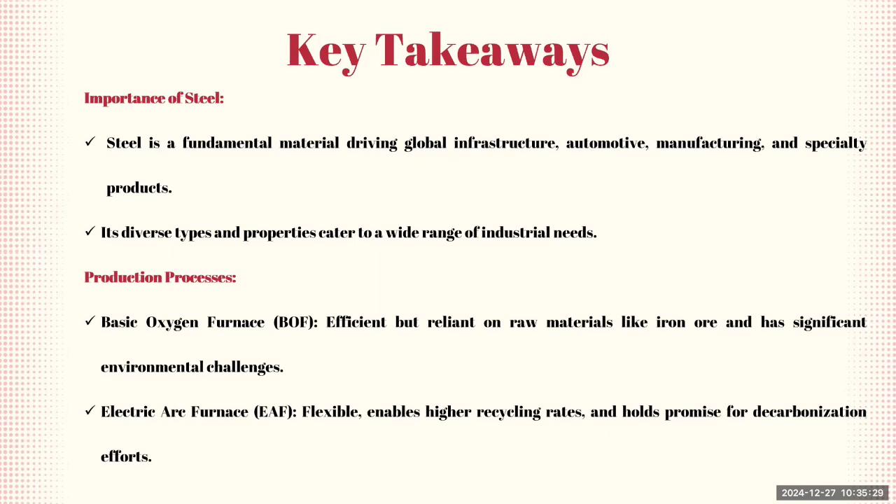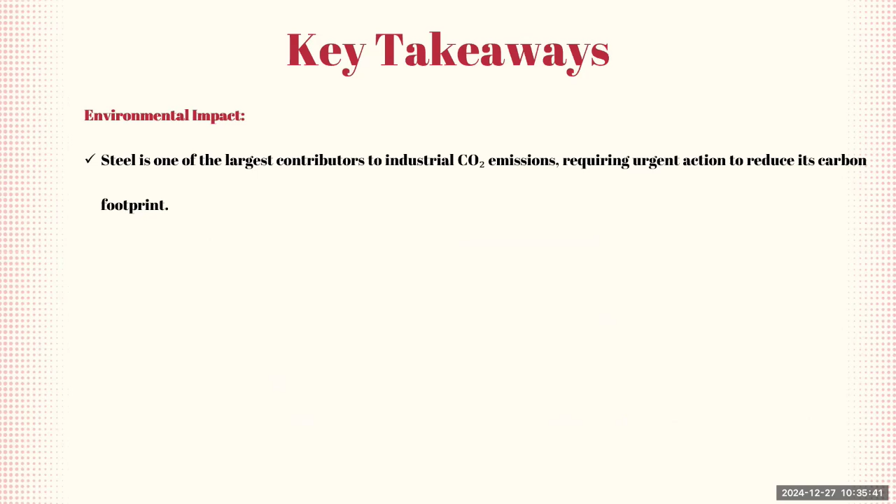As for the environmental impact, we saw that steel is one of the largest contributors to industrial CO2 emissions, requiring urgent action to reduce its carbon footprint. As for sustainability practices, we need to embrace innovative technologies like hydrogen-based reduction, maximizing recycling, and improving energy efficiency, which are the most important steps forward.

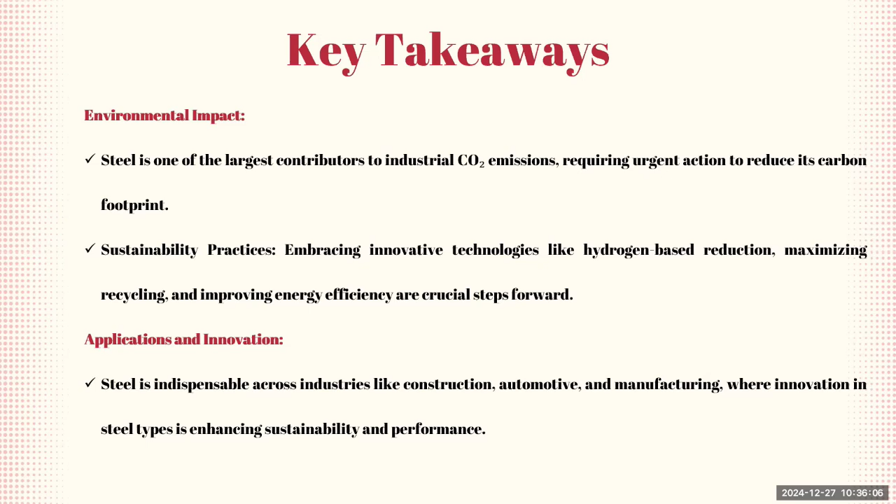And lastly, for applications and innovations, we saw that steel is indispensable across industries like construction, automotive, and manufacturing, where innovation in steel types is enhancing sustainability and performance. With that, we have reached the end of the talk.